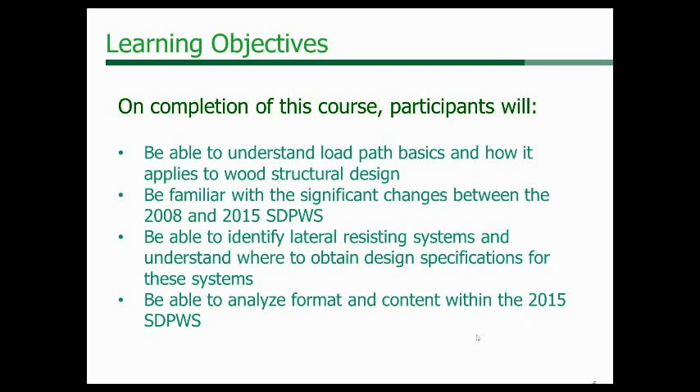Today we're going to talk about being able to understand load path basics and how it applies to wood structural design. We'll also look at the significant changes from the 2008 to the 2015 wind and seismic provisions. And then you'll be able to identify lateral resisting systems and understand how to obtain design specifications. Additionally, you'll be able to apply, understand the content and the overall organization of the wind and seismic provisions.

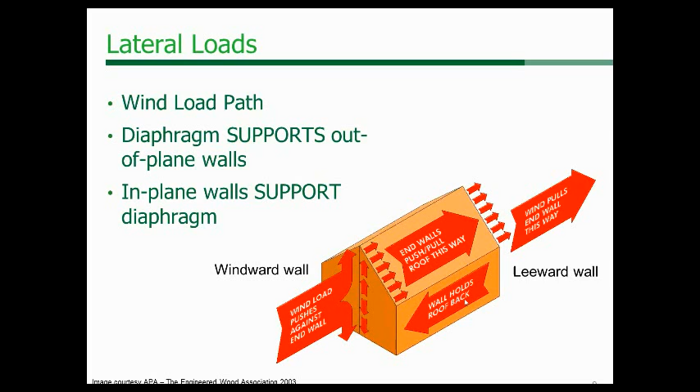And the roof acts like a diaphragm that spans like a big beam to the vertical lateral resisting system, which is typically your shear walls. If we look at a square building, a different illustration, we would see again the wind applying pressure to those studs, and then the diaphragm acts like a deep beam that spans from shear wall to shear wall that resists those loads.

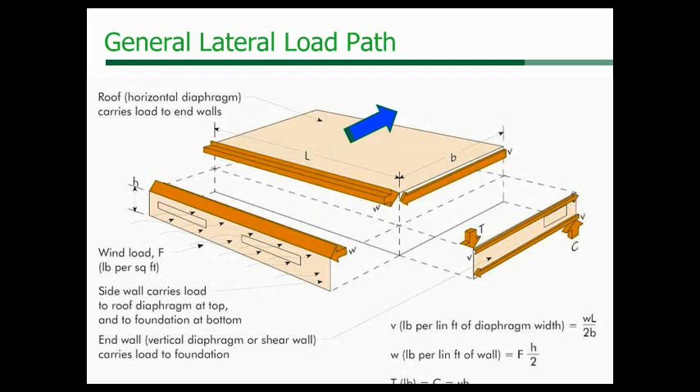Now when we're dealing with seismic loads, it's actually the earth that applies that force to the building, and the building wants to catch up. A lot of that deals with force equals mass times acceleration, the mass of the building that resists that load. We idealize it as if the lateral load is concentrated or applied in the roof diaphragm, and similarly to wind loads, that roof diaphragm acts like a deep beam and transfers the load to the shear walls.

Now if we get a plan view of the diaphragm, we would see that a uniform load on the diaphragm acts like a deep beam. We have the chord forces, compression on the top and tension on the bottom. And then we resist that load. The diaphragm transfers that load to the shear walls, and the reaction goes to the shear walls.

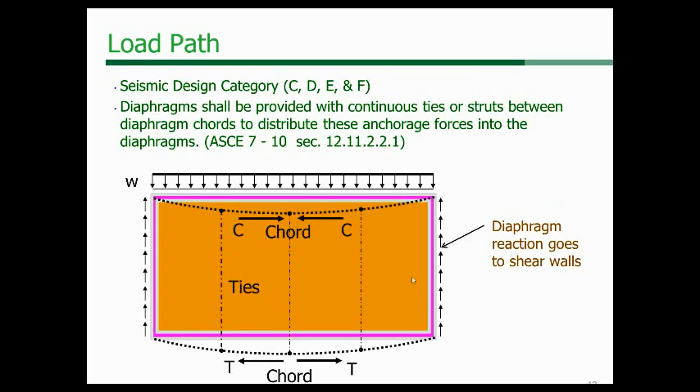And if we're dealing with seismic loads, in seismic design category C through F, we are required to have continuous ties. We'll get more into this when we're talking about diaphragms that resist masonry and concrete heavy wall loads, which is something new to the wind and seismic provisions. But we'll go into this in more depth later in the presentation regarding continuous ties and struts.

The basic structural elements of the building are your diaphragm, which is in the horizontal plane, which has collectors to provide a continuous load path. And then we have shear walls, your vertical lateral resisting systems, and those also have drag struts or collectors to continue the load path to those elements.

If we're looking at diaphragms, we can idealize those diaphragms as flexible or rigid diaphragms. We'll go into that in more depth later in the presentation, because this is one of the areas where we've made some changes to the wind and seismic provisions regarding transferring the horizontal force to the vertical lateral resistance system, and how that looks when dealing with flexible, rigid, or semi-rigid diaphragms.

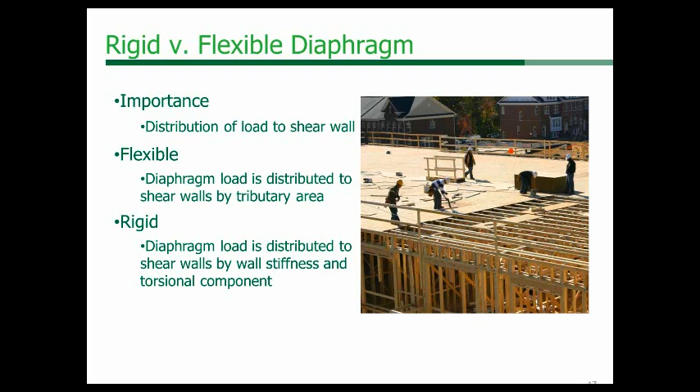We can categorize or idealize the diaphragms as flexible, and flexible diaphragms transfer that horizontal load based on tributary area, whereas a rigid diaphragm transfers the load based on the stiffness of the walls, and there's a torsional component to it as well. Looking at a very simple diaphragm that shows the stiffness of the walls, we have a uniform load on the top, which is a W, and certain stiffnesses of our shear walls. The outer walls have a stiffness of 2 times the interior wall, which is 1K.

If we base the distribution based on a flexible diaphragm, we would see that 25% of the load goes to each outer wall, just based on pure tributary area. So a quarter of the load goes to each outer wall, and half the load goes to the inner wall. Whereas with a rigid diaphragm without a torsional component, we just base it on the stiffness of the shear walls. We would see that 40% of our load goes into each of the outer walls, and 20% into the interior wall, because we have a stiffer wall on the exterior walls. We'll get more into this later when we talk about horizontal distribution, but this gives you an overview of how the loads are transferred between flexible and rigid diaphragms. There's quite a bit of difference in the actual load when you design them the two different ways.

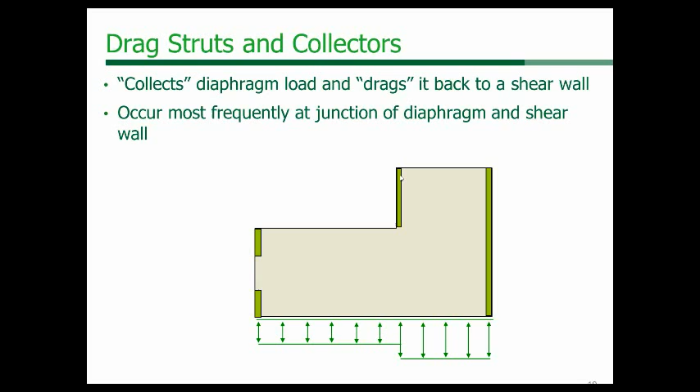As I mentioned previously, we talked about having a continuous load path. We're looking at a typical layout of a load in the north-south direction, up and down the sheet, and the shear walls involved. We have some walls on the left, a middle shear wall, and one on the right. In the east-west direction, we would have a similar layout of shear walls. The key is we want to be able to transfer the load from our diaphragms and make sure that load gets transferred to the shear walls, and that's where we incorporate collector beams that can be in the plane of the floor.

In addition, we'll require some type of drag strut to make sure that the load is transferred within the line of the shear walls to make sure we get distribution to those walls.

If we're looking at a section of a drag strut within the roof diaphragm, we would see a collector beam, making sure that collector beam is nailed off from the diaphragm to the collector beam to transfer that load.

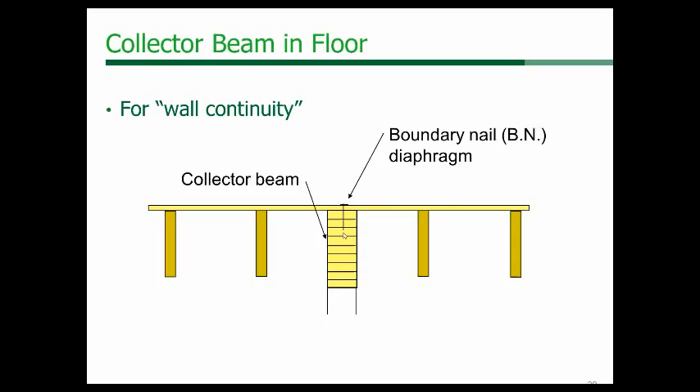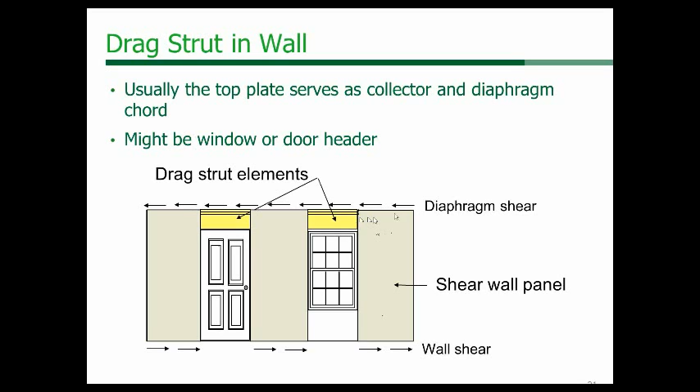Similarly, in the wall plane, if we're treating this as segmented shear walls, looking at the full height shear wall, we would need some type of collector to make sure the load gets transferred to these shear walls. A lot of times it's just the top plates, or we could have the headers acting as a drag to connect it to each other.

Now, going back into basics regarding shear walls, this is just a typical shear wall, a 4x8 shear wall. There are 5 parts of the shear wall. We have the wood framing that makes up the skeleton of the shear wall, and then we have the wood structural panels and the nails.

The wood structural panels and nails provide the stiffness and strength to that shear wall to resist the loads that we want to resist. Then we have the anchor bolts and the plates, the washers or connectors at the bottom of the plate that transfer the load from the top.

We start off with the load at the top of the wall. It gets transferred through the framing and the wood structural panels and nails to the bottom of the wall, which gets transferred to the foundation through those anchor bolts and plates. Then to resist overturning, we have hold downs, because when this load is applied, the load wants to overturn that wall.

There is a difference between the vocabulary of uplift and overturning. I think Buddy will get into this later when he talks about overturning, but for those used to designing in seismic areas, they tend to say there's uplift on the end of the hold down, and there's a different uplift we design for, which is uplift of the building because of the uplift of the roof — we'll look at that later. But the overturning of the shear wall is resisted by the hold down, and I'm sure Buddy will clarify this.

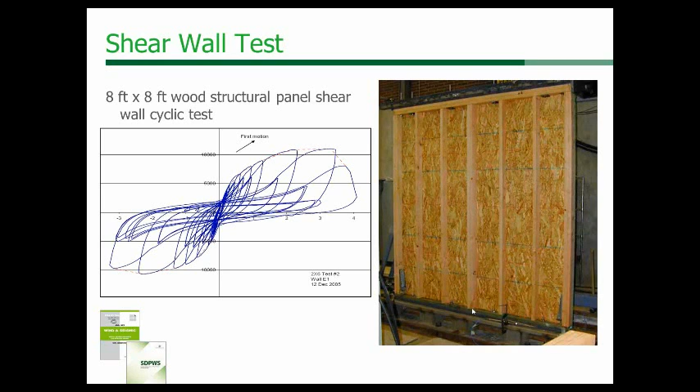Also, the panel joint that you see, these are two 4x8 panels. The panel joint, there were some challenges here with pulling out. I'll show you here. Where previously, if there was heavy nailing and there was only one stud there and a lot of nailing, there can be some issues there. But Buddy will mention this later in the presentation.

Some typical failures shown here: for the picture on the left, we have nail yielding at the adjoining panel edges, and for the picture on the right, we have nail yielding where the head of the nail is pulled through the panel, and also nailing on the left where it's pulled away from the framing. But the mode of these failures is the nail yielding, which is what we want. We want a ductile failure, not a brittle failure.

Buddy will mention this when it gets into the detailing requirements. A little bit of background: in the wind and seismic provisions, there are 3 types of shear walls that are covered.

We have the individual full height segment walls, which is what has been used throughout many years of designing shear walls, where we're dealing with a hold down. Here on this end, we have a shear wall here where there's a hold down here and here. And then there's a shear wall here with a hold down here and here.

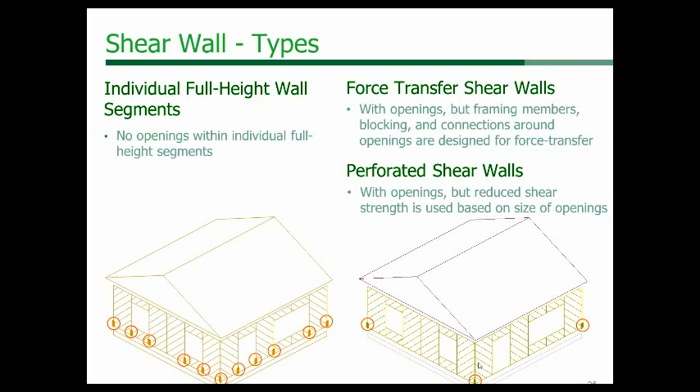Now, how is this adopted in the code? In the 2012 IBC, which many of you may be on, the 2008 is the reference document for the wind and seismic provisions in the 2012. It's not until we get to the 2015 IBC that it adopts the 2015 wind and seismic provisions. That's how it's adopted. And all previous, I believe even 2006 and 2009, adopted the 2008 also as a reference document.

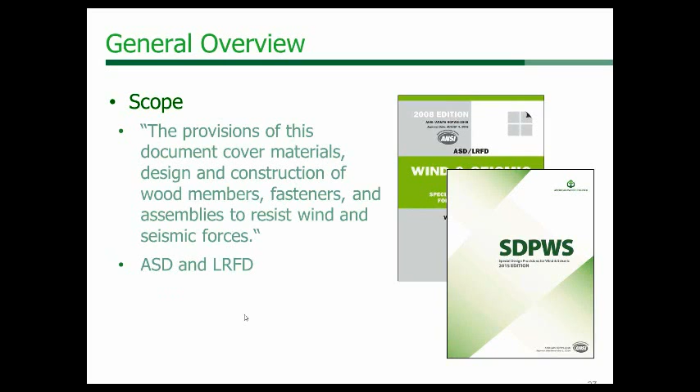Now, what does the wind and seismic provisions cover? The provisions cover the materials, design, and construction of wood members, fasteners, and assemblies to resist wind and seismic loads. It includes both a dual format, ASD and LRFD, and we'll point these out throughout the presentation on the differences.

The first chapter is very basic. It's our design flow chart, and the philosophy of how this is created is that you assume a trial design, you decide what method you want to use, ASD versus LRFD, and you go down the path, hopefully your capacity is greater than your demand. If it's not, you do a reiterative process and try a new design.

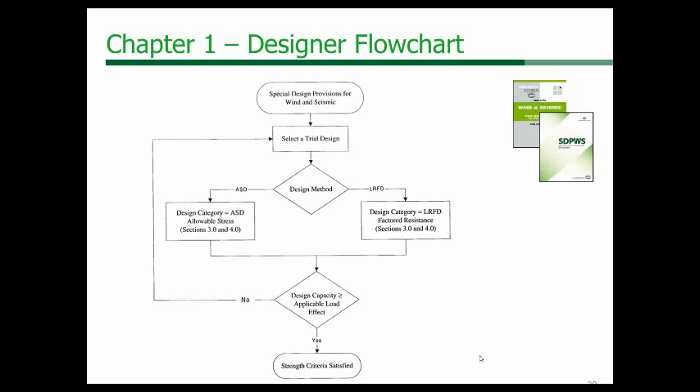General requirements is in Chapter 2, and this is where we get into our terminology, our notations, the abbreviations that are used throughout the wind and seismic provisions.

One section new to the 2015 wind and seismic provisions is section 2.1.3, and it has to do with sizes. It's to incorporate the language that we use nominal panel thicknesses when providing these provisions, as it relates to performance category nomenclature of PS1 and PS2. We all know panels are manufactured very dry, and when they get to the job site they tend to acclimate, and the thickness changes with the environment in service use. This section provides clarifying language that what is assumed is that we are using nominal panel thicknesses in the design provisions.

Also new to Chapter 2 are definitions. If some of you are familiar with the 2008 wind and seismic provisions, you know we had a section for open front diaphragms and cantilevered diaphragms. They were actually 2 separate sections.

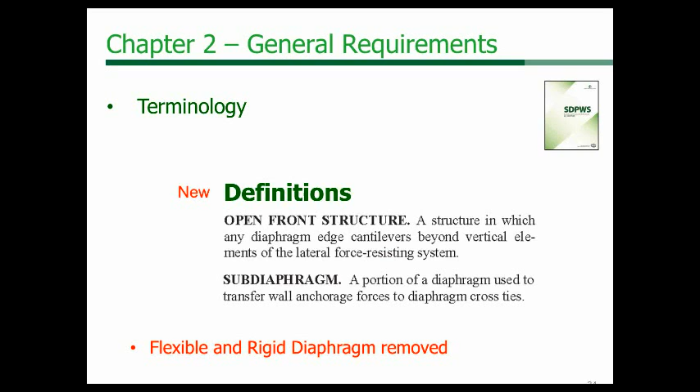Additionally, we've added a definition for subdiaphragms: a portion of the diaphragm used to transfer wall anchorage forces to diaphragm cross ties. This was incorporated because we have a new section covering subdiaphragms related to anchoring of heavy walls, such as concrete and masonry walls, into the diaphragm. We'll go into that in more detail later in the presentation.

We've also removed the definitions for flexible and rigid diaphragm, to avoid conflicts with the definitions in ASCE 7-10, and also because you don't really have a flexible or rigid diaphragm -- you can idealize it. That's the language we'll use throughout the wind and seismic provisions, and we'll show you how you can idealize it as a flexible or rigid diaphragm later in the presentation.

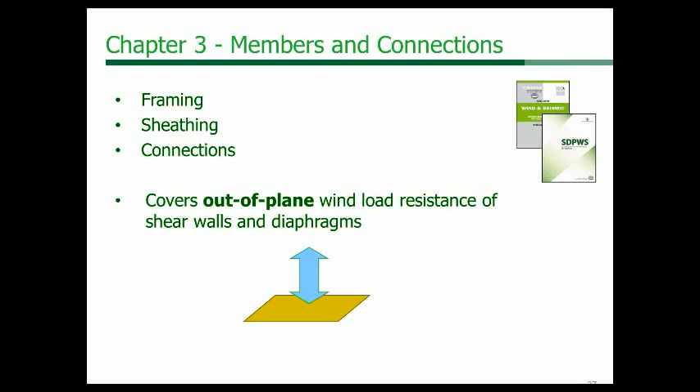Now we're getting into Chapter 3, which is members and connections. This deals with your framing, your sheathing, and your connections, as well as those members resisting out-of-plane loads, your diaphragms or the sheathing for the walls. This is a section you would go to for out-of-plane and individual framing and connections.

One change for the wind and seismic provisions has to do with the repetitive member factor for wall studs when designing wall studs for out-of-plane loads. If wind is being applied to that framing system, it needs to resist flexure and out of plane, or resist a load out of plane.

This repetitive member factor accounts for a composite action that occurs because we have a wall stud that's nailed off to the wood structural panel, and there's also an assumption that it's connected to the gypsum on the other side—those assumptions are spelled out in this section. There's a composite action because all those members act as a system together.

What's new to this section is that you can apply this not only to strength, your flexure resistance, but also to stiffness when checking deflection of that wall stud. If you have a brittle finish and need to check stiffness, this repetitive member factor can be applied—so now it covers both strength and stiffness, your EI.

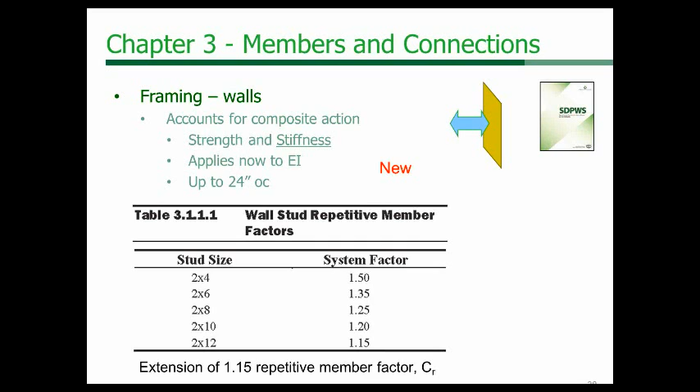In addition, what's new is we've increased the spacing of the studs from 16 to 24 inches, so this can be applied to 24 inches on center as well.

A revision has also occurred to the out-of-plane table, which covers nominal uniform capacities for wall sheathing resisting out-of-plane wind loads. Previous to 2015, in the 2008 edition, the sheathing capacities were based on a 3-ply product, but it was found impractical to manufacture 3-ply, and those panels are no longer commercially available. So now, for the 4824, the values are based on a 4-ply panel, which has more stiffness and more capacity, so you'll see an increase in the values.

Similarly, for out-of-plane wind loads on roof systems, we've had an increase in capacities because now it's based on a 4-ply or 5-ply panel, depending on span rating, instead of 3-ply. So that's new to the system.

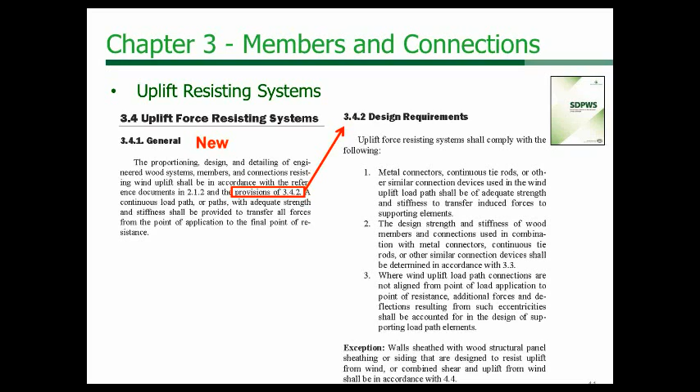But for areas with that net effect, the load has to be transferred all the way to the foundation. What's new is section 3.4, which covers the continuous load path of that load down to the foundation, and provides charging language that you need to provide a continuous load path adequate in both strength and stiffness to resist the uplift load. It also addresses eccentricities in the system that need to be accounted for in design.

I'll get more into that in this slide. So we have uplift of the rafters, and that uplift needs to be resisted. We need to provide a continuous load path all the way down to the foundation, whatever system you provide. In this illustration, we have straps connecting the studs continuously, plus additional straps where there's a discontinuity in the framing system.

When I mention eccentricity, sometimes—and this may happen a lot—you may have an eccentricity in your load path because the studs don't all line up, or your rafters don't line up all the way down. If there are eccentricities in that load path, that needs to be taken into account in the design. You could specify that they all align, but you may run into issues.

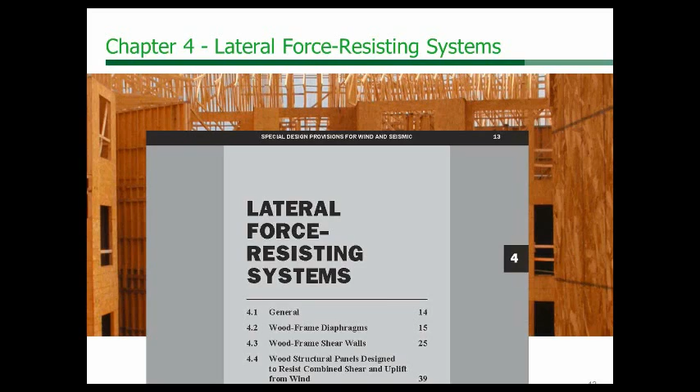Now on to the bulk of what we want to talk about: our lateral resisting system, which resists loads in plane. This is where we talk about diaphragms and shear walls. When I'm through with diaphragms, Buddy will take it from there on shear walls. This section covers wood diaphragms and wood shear walls that resist in-plane loads—diaphragms is what we'll get into now.

Hopefully all of you are still with me. Now, let's talk about the introduction of the definition of sub-diaphragms, which I mentioned earlier.

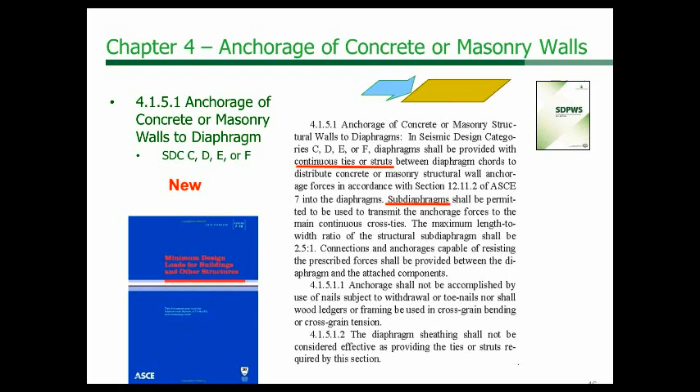When we're dealing with seismic loads, if we have diaphragms spanning from shear wall to shear wall, these concrete walls will tend to want to pull away from the diaphragm when an earthquake occurs. It's very important that the wall is anchored into the diaphragm enough so it can resist the loads in the diaphragm and then transfer that load to our shear wall. That occurs in the opposite direction as well.

This is very evident in past earthquakes where there have been failures on buildings where they weren't adequately anchored into the diaphragm, and the wall pulled away from the diaphragm, causing a collapse of the roof.

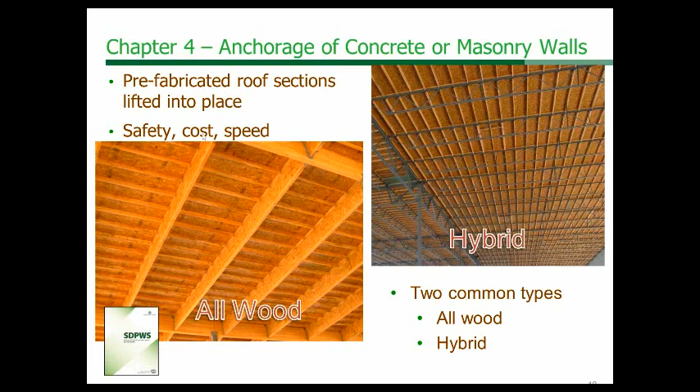There are two basic types of diaphragm: an all-wood diaphragm, or a hybrid diaphragm that uses steel bar joists. The whole philosophy is that if you have a wall, we want to anchor it through these subpurlins into the diaphragm to develop the load enough so it can transfer to a larger diaphragm, which then transfers through to the shear walls and also ties across to the other side of the building. We would anchor perhaps every other subpurlin, continue the tie, and develop your diaphragm loads so it transfers from this sub-diaphragm to a larger diaphragm that has a tie across the building.

Here's a detail showing that. Now, the one thing I want to point out is that for diaphragm loads, when we anchor this wall into this purlin, we want an anchor on each side of the purlin to prevent eccentricities that can occur if it's only loaded on one side. Additionally, we want to nail off this diaphragm to the purlin to make sure you're developing that load into the diaphragm, and then provide continuous ties across.

Especially in seismic design category, I think I mentioned C through F, or maybe it was B through F earlier in the presentation. Here's another example of a tie that's anchoring this either masonry, CMU, or concrete wall into the diaphragm.

What we don't want is this, which has occurred in previous detailing. Since they're not tying this into the diaphragm, this can cause cross-grain bending in the ledger, which has caused some failures in the past. So we don't want this type of system.

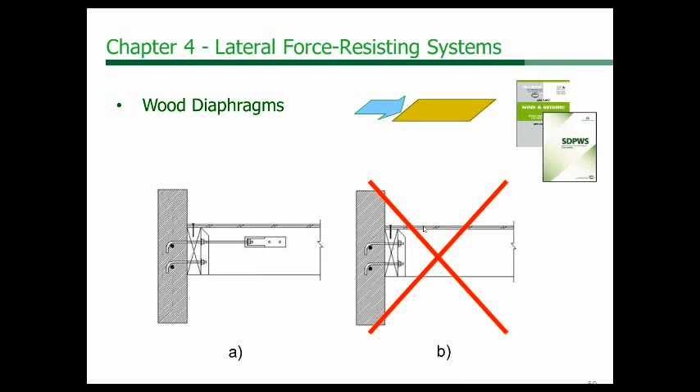What we want is to have it tied into the purlins or sub-purlins to drag that load into the diaphragm and develop it into the diaphragm. So this is a new section, charging language that covers this type of design.

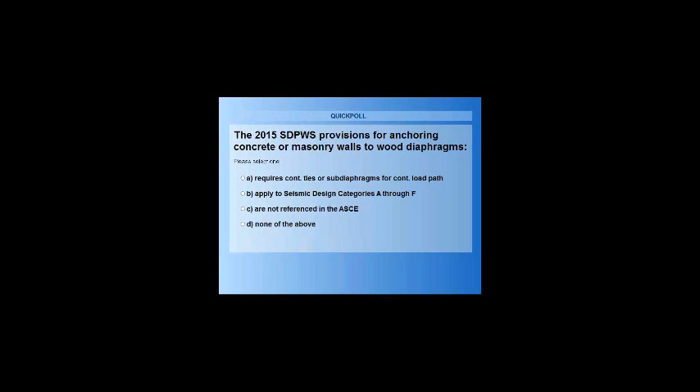Sharing results: 93% say it requires continuous ties or sub-diaphragms for continuous load path. 3% say it applies to seismic design categories A through F. 1% say not referenced, and 3% say none of the above.

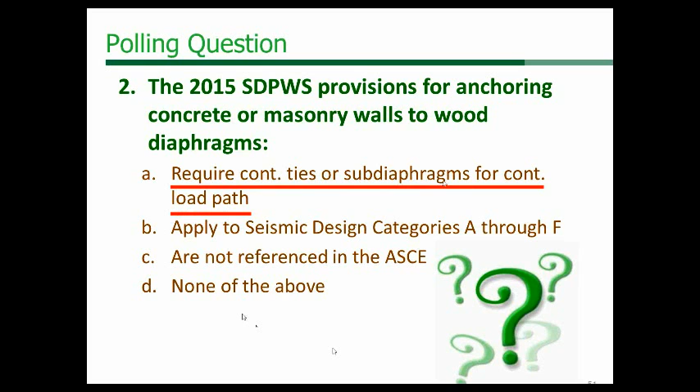The real answer is that it requires continuous ties and sub-diaphragms for continuous load path, and it does not apply to category A through... I believe it's C through F, or D through F. It is referenced in ASCE 7, so the correct answer is some of the above, answer A. Most of you got that right, so that's great, we're communicating clearly hopefully.

Now, wood diaphragms. In section 4.2.2 we have the deflection equation, which is now a three-part equation - it was actually a four-part equation in the 2008 Wind and Seismic provisions. The first part deals with bending, chord deformation excluding slip. The middle term includes shear, which is panel shear and nail slip, combining the two inner terms of the original four-part equation. The last term covers bending, which includes chord slip.

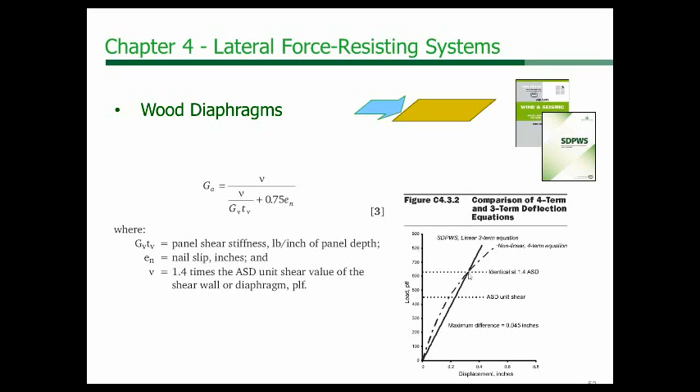That's the great news about going from a four-term to a three-term equation. For die-hard four-term equation fans, it's still in the commentary of the Wind and Seismic provisions, but again that's only for blocked diaphragms. When we transitioned from a four-term to a three-term equation, you can see on this chart that the three-term equation is linear, straightening it out, whereas the four-term was non-linear. But at strength level forces, 1.4 ASD, the two equations are identical, and between 0 and strength level forces there's a difference of only about 0.045 inches - very little difference between the two equations.

If you're interested in the 2008 commentary - Buddy, you can fill me in later - there's an actual design example of mid-span diaphragm deflection. I believe it's going to be in the 2015 edition as well, and Buddy can confirm that later; the commentary is being developed right now.

Now we're looking at capacities. We have a demand on the diaphragm, so we go to table 4.2 to get our nominal unit shear capacity wood diaphragm values. I mention nominal because this table is to be utilized for both ASD and LRFD. There are also two sections: section A for seismic and section B for wind. The seismic section includes the apparent shear stiffness values as well for both OSB and plywood.

These tables were developed based on applying a 2.8 factor to those values that were in the legacy IBC, which has to do with the PS2 and PS1 performance standards used for manufacturing the panels. A safety factor of 2.8 is incorporated into those performance standards and applied to the IBC legacy values, so you multiply to get a wind nominal unit shear value. Then the straight ratio from wind to seismic design is 1.4, which is a typical value.

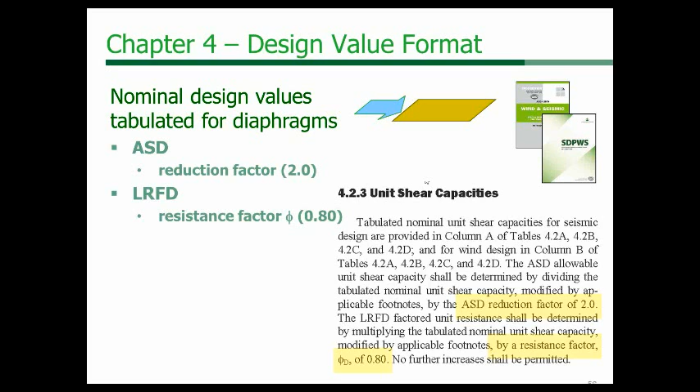You divide by 2 to get it into an ASD value, and you multiply times 0.8, the resistance factor, to get it into an LRFD value. And that was true, no changes to those tables from 2008 to the 2012 or 2015 editions.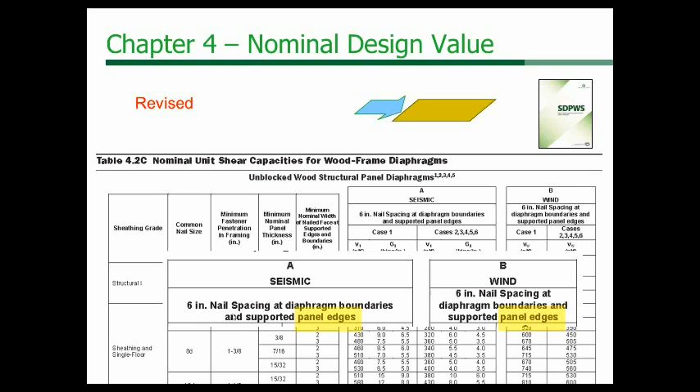There's been a slight revision, or clarification, for the unblocked diaphragm notes - if you see the highlighted note that says 'panel edges.' Before, it used to say 'members,' and there was some confusion that the nailing of the members to the framing, and even field nailing, needed to be decreased from 12 inches, or whatever it is, to 6 inches on center. This is just a clarification that we're talking about the panel edges, not the field nailing. So it's a slight change, a slight clarification.

You'll also note that the illustrations for the diaphragm configurations have changed, just to make things more clear. We've grouped case 1 and 3, case 2 and 4, and case 5 and 6 together, to illustrate that the capacity of the diaphragm depends on the direction of load relative to the continuous panel joints and the framing members - it's independent of the panel orientation. I'll give you an example.

For example, here where we have case 1 and 3, we have a load in the east-west direction. The continuous panel edges on load case 1 and 3 are all in the same direction, as you can see in the illustration. Right below it, the panels are oriented 90 degrees, but the continuous panel edges are still in the same direction, and the framing is in the same direction. So this clarifies it a little more clearly.

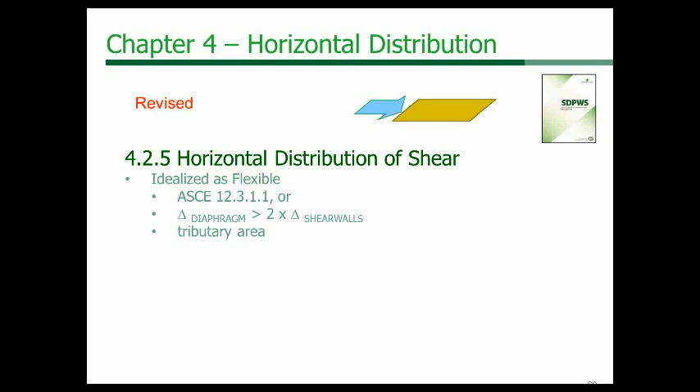ASCE has some prescriptive provisions - meaning it's a recipe - where if you meet them, you can categorize it right off the bat as a flexible diaphragm. For example, if you're a 1 or 2 family dwelling, or have less than or equal to a 1.5 inch concrete topping with certain light frame construction, you can categorize it as flexible. You can also calculate the deflection of your diaphragm and shear walls - if your diaphragm deflection is greater than 2 times your average shear wall deflection, you can idealize your diaphragm as flexible. That tells you that you meet one of these criteria, and you can transfer the load to the shear walls based on tributary area.

The other method is idealizing it as rigid. Similarly, ASCE 7 has a prescriptive method that states if you meet this criteria, you can idealize it as rigid. However, in ASCE 7, prescriptively, there's no way for a wood diaphragm to meet that criteria as rigid, because it requires it to be concrete or concrete over metal deck. There's no provision for a wood diaphragm to prescriptively meet the rigid criteria.

You also have a calculated method of determining if you are rigid - that is, your diaphragm deflection is less than or equal to 2 times your average shear wall drift. Then you can transfer the loads based on the lateral stiffness of your vertical lateral resisting system. Now beyond that, let me go here.

What is new to the wind and seismic provision is the envelope. If you can't idealize a diaphragm as flexible and you can't idealize it as rigid, you're semi-rigid, and analyzing something as a semi-rigid diaphragm is a complex analysis. I'm not sure many engineers actually go through these difficult calculations to determine a semi-rigid analysis. What we've introduced in the wind and seismic provision is the envelope solution: you analyze it as flexible, you analyze it as rigid, and you take the governing load to those shear walls. You're over-designing it by a little bit, but you're taking that envelope solution to analyze that structure.

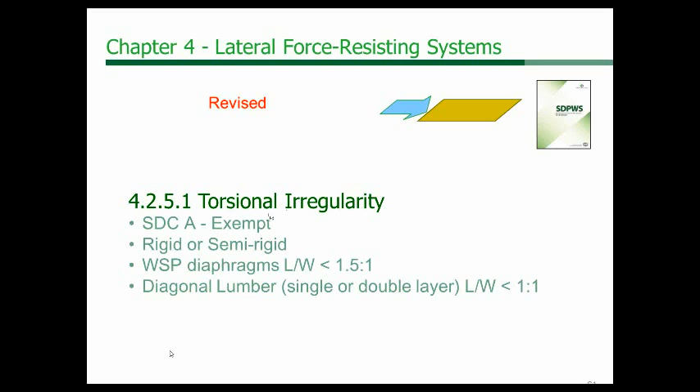For torsional irregularity, Seismic Design Category A is exempt from considering these torsional irregularity parameters. If you're transferring loads in a torsionally irregular system, the diaphragm needs to be analyzed as either rigid or semi-rigid. It makes sense — how is it going to transfer the loads to those vertical lateral resisting systems without having some stiffness to that diaphragm to transfer the load?

Now, for diaphragms that are torsionally irregular, the wood structural panel diaphragm aspect ratios are reduced, so L over W needs to be less than 1.5 to 1. For diagonal lumber diaphragms, either single or double layer, that aspect ratio is 1 to 1.

For those that are torsionally irregular, there's a check that needs to be performed: the maximum story drift at A needs to be greater than 1.2 times the average of A and B. That's your check for determining if you're torsionally irregular. The one thing that the language in the wind and seismic provision has clarified is this specific check — it now states that you need to check the story drift per this equation.

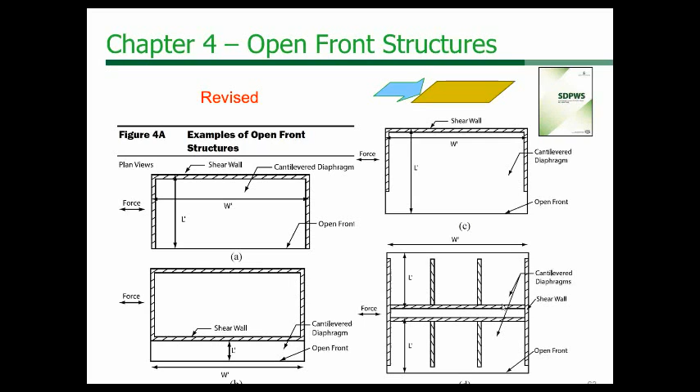What's new, to reflect what's really going on in the industry and how buildings are being built, are illustrations C and D, especially D, which reflects many mid-rise structures that have a long corridor through the center of the building, with an open front diaphragm. So we'll go into more detail on open front diaphragms and the related criteria. For open front diaphragms with no torsional irregularity in the building, it's similar to a torsionally irregular building — the aspect ratio for wood structural panels is L over W of 1.5 to 1.

And then similarly, diagonal lumber, single or double layer, is 1 to 1. Has to be less than 1 to 1. Now, if you're open front diaphragm and also torsional irregular, then the aspect ratio is even more strict. For those buildings over 1 story, it needs to be less than 0.67 to 1, and for 1 story, you get a little break of 1 to 1.

In addition to the criteria I mentioned previously, you also need to check to make sure you meet the allowable story drift, ASD story drift, which means that drift needs to be less than the allowable story drift at the outer edge of the building. So this provides you with a specific criteria that needs to be met on the drift at the edge of the building, or the outer edges of the building. And it needs to be modeled as semi-rigid or rigid.

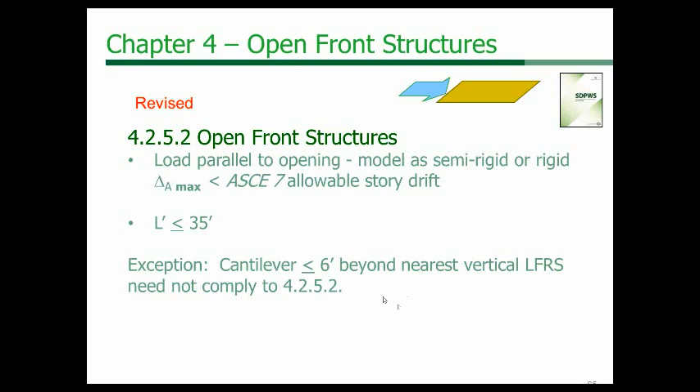And there's an exception to the rule. You can have a cantilever for those that have a 6-foot cantilever beyond the lateral resisting system. The vertical lateral resisting system doesn't have to comply with the 4.2.5.2 provisions. So you get a break for just a 6-foot cantilever.

Also, if you're dealing with, for example, a garage that's only 1 story, it's not going to have as much of a challenge resisting the load since it's 1 story. As long as you don't have to meet the provisions of 4.2.5.2, and you're only 1 story, your diaphragm depth is less than 25, and your aspect ratio is 1 to 1, you can idealize it as rigid without going through all the other criteria, and distribute the load to the shear walls through the torsional method.

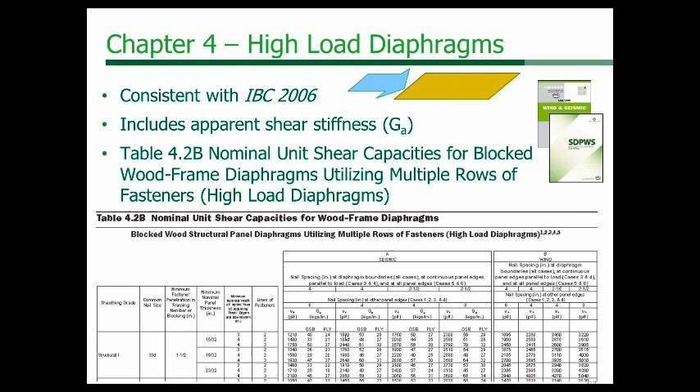Now, on to high-load diaphragms, and we're almost coming up to the end of this section. High-load diaphragms were in the 2006 IBC, and introduced into the 2008 Wind and Seismic provisions. High-load diaphragms provide you with almost double the capacity of what you'd see for regular diaphragms. It looks similar to the typical diaphragm table, with nominal unit shear capacities, a wind section and a seismic section, but it also requires multiple nominal thicknesses, requirements of your framing members and depths, and 2 or 3 lines of fasteners instead of just one, plus special inspection of the diaphragm to utilize this method.

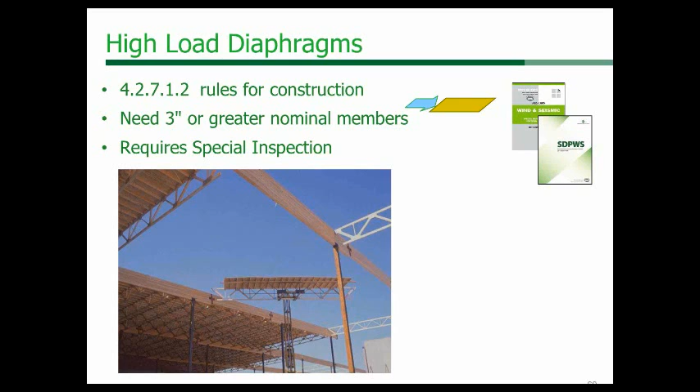Similarly to the previous load capacity diaphragm tables, we have a revised configuration of the figure showing the different load cases. As I mentioned, it requires special inspection and a 3x minimum framing member to nail to, or 2 2x—Buddy will get into that later. There's also a clarification in the 2015 that a minimum depth of the framing member is required, which is 3x minimum. This also came from the IBC into the 2015 Wind and Seismic provisions.

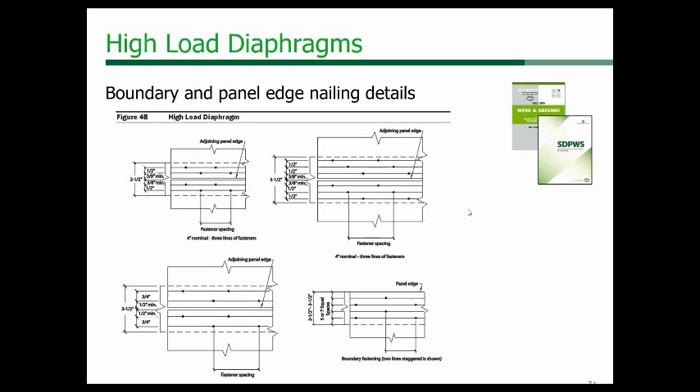Here's an illustration in the Wind and Seismic provisions showing multiple rows of nails. You can see a framing member that needs to be 4x minimum because of 3 rows of nails, with the panel joint here and 3 rows of staggered nails on each side of that joint. This shows one of the reasons why we require a 3x minimum as opposed to a 2x minimum—when you get closely spaced nails, it can cause splitting.

So we have our last poll, I believe, for my section. That is true. Sorry, I had trouble finding my little button.

Open front structures are limited to a maximum diaphragm length of blank in the 2015 Wind and Seismic: 25 feet, 35 feet, 50 feet, or open front structures are not allowed in the Wind and Seismic. Several of you are already voting—that's great. Majority of you are already voting on one answer. I'm not going to give it away.

All right, about 10% more I'm going to let vote. Hurry, hurry before I close. That may have should have said maybe over 1 story, but I think the audience will get this answer. You said it correctly because you read the slide, it should have been stated probably different.

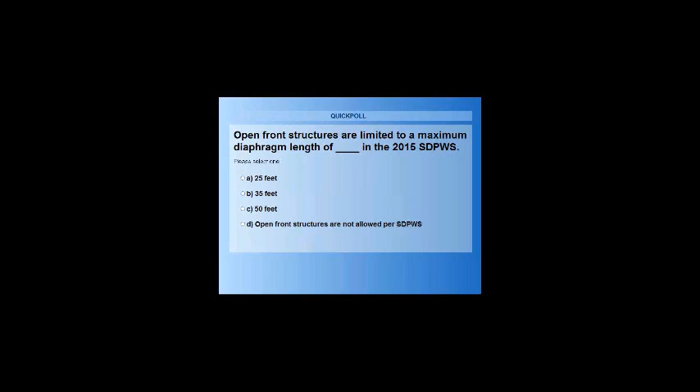Okay, all right, well I'm going to go ahead and close now and then share the answers. All right, 68% of you said 35 feet, 21% said 25 feet, and 9% said 50 feet, and none of you believed that they are not allowed. So, all right, Michelle, I'm going to go ahead and let you share the real answer.

Okay, and the real answer is, drum roll please, 35 feet. And this applies to those that don't meet the requirements of the 1 story, but for those, 35 feet is the maximum length, the depth of the diaphragm. So thank you very much.

We'll transfer over to Buddy. All righty, here we go. All right, there you go. Okay, thank you, Michelle and Marcy.

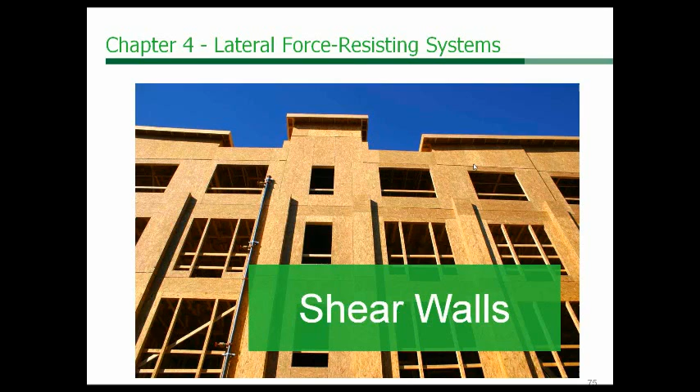We'll transition now into shear walls and then leave some time at the end for some Q&A. As we begin the discussion of shear walls, some of this will be very similar to what Michelle shared earlier.

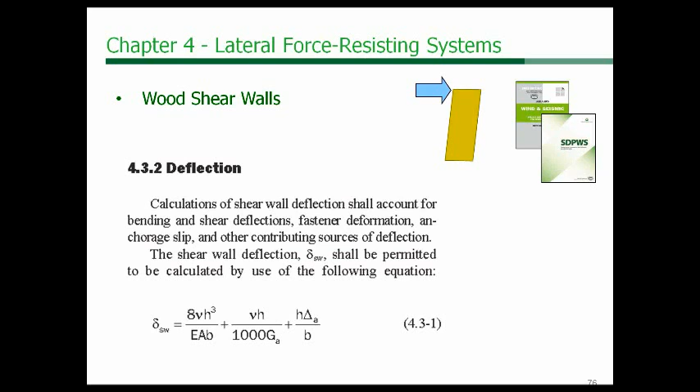The deflection equations used for shear walls are comparable. The three-term equations are what are shown in the body of the document, and the four-term equations are also included in the commentary.

One relatively new provision for structural fiberboard shear walls is an additional reduction that was incorporated because of some additional review of testing, which revealed that we needed to be a little bit more conservative with the structural fiberboard shear walls. So make note of that new reduction there, H over B to the 1/2.

Again, similar to what Michelle discussed earlier with the diaphragm capacities, shear wall capacities are developed in a similar fashion, and so the result is similar capacities to what were shown in the legacy IBC tables that contain those values.

We've had several questions from folks about the fact that the nail shear wall and diaphragm tables have been moved from the IBC into the special design provisions for wind and seismic. That was done intentionally a couple of code cycles ago. The thought was that the ANSI consensus process and the standards development committee, the Wood Design Standards Committee that develops this standard, is a more rigorous process than the code development process.

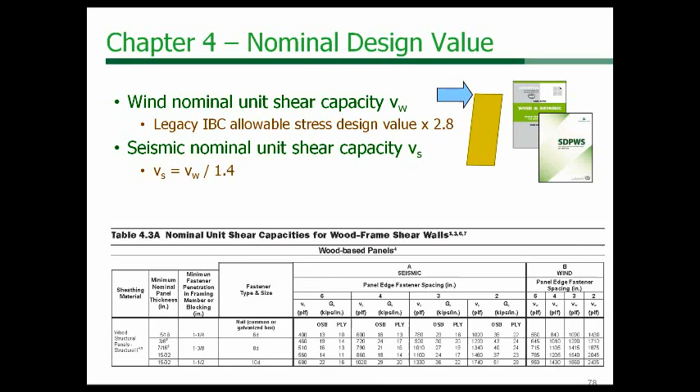But again, similar to what Michelle mentioned for diaphragms, there's an ASD reduction factor of 2 and an LRFD resistance factor of 0.8. We can't stress enough that the design values shown in the wind seismic standard are nominal values. They are neither ASD values nor LRFD values, so you do have to take an additional adjustment factor to those values prior to the design process.

This slide just gives an indication of how that works. We also had some questions along the way about the load factors and how that impacts the design.

Based on these ASD and LRFD reductions in the load factors that are used for LRFD versus ASD, you do see a benefit, a strength benefit for LRFD of about 12% based on the load combinations shown here.

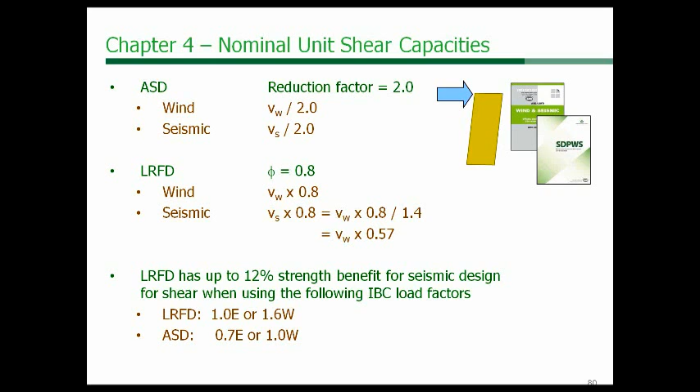We've done our best over the years to calibrate the LRFD approach to historical ASD design provisions, but as the load standards and load factors are changing and research is going into that area, the LRFD load combinations, you will see cases like this where you do see some benefit to LRFD versus ASD.

Note also that for shear walls sheathed on two sides - this is not a change since both the 2008 and 2015 wind and seismic standards show this. This deals with two-sided shear walls and nailing to opposite sides of the shear wall. Footnote 6 states what needs to be done, but it's easier to see with a picture.

Where you have adjoining panel edges and the panels are staggered on opposite sides - so here's a panel joint with nailing, but the other panel joint on the other side is elsewhere - then 2x framing is acceptable. The problem is if you've got adjoining panel edges on opposite sides on the same framing member. Test results show this creates potential for splitting because you've got so many nails into that framing member. So when they're not staggered, you're going to have to go to 3x framing. That's the illustrated version of footnote 6.

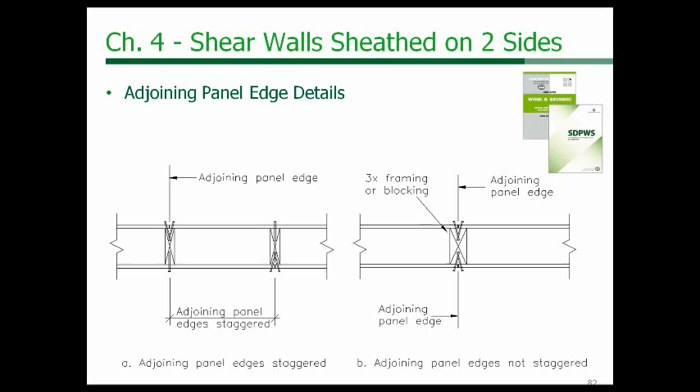Unblocked shear walls are also possible - again not a change, but we want to point it out. Another question that came in while Michelle was teaching had to do with laying up panels horizontally versus vertically, which is a regional preference. I've heard that in North Carolina, for example, they like to lay panels up horizontally on shear walls, and unless you block the edges of those horizontal panels, you'd have to use this unblocked shear wall adjustment factor. You can get as much as a 60% reduction in capacity at 24 inches on center.

The normal 16-inch on center has a reduction of about 40% for 6 and 12 nail spacing. But it is possible to use unblocked shear walls. There is a 16-foot height limit and a 2-to-1 aspect ratio, but it has been tested and shown to work, and that applies not only to the strength of the panels and the layup, but also to the stiffness. So you'd have to account for that reduction in your stiffness calculations as well.

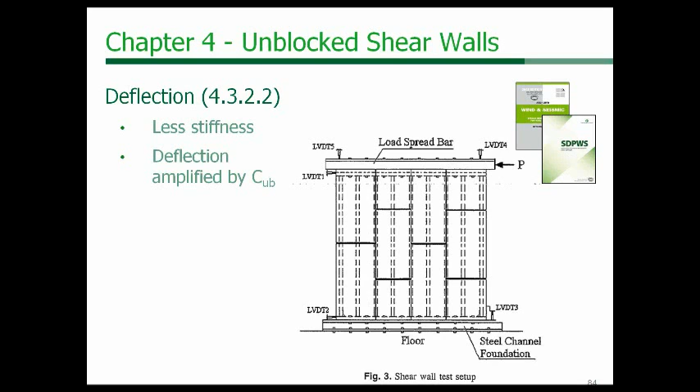Again, not a change, but something we like to talk about to make sure everyone understands: if you are summing shear capacities and there are dissimilar materials on opposite sides of the shear wall, you're either going to take 2 times the smaller nominal unit shear capacity or the larger nominal unit shear capacity on one side, whichever is greater. But there is an exception for wind design - the wood structural panels and gypsum on the opposite side are additive in that case. That gives you an additional benefit in high wind zones where you're able to account for the gypsum on the opposite side of the shear wall.

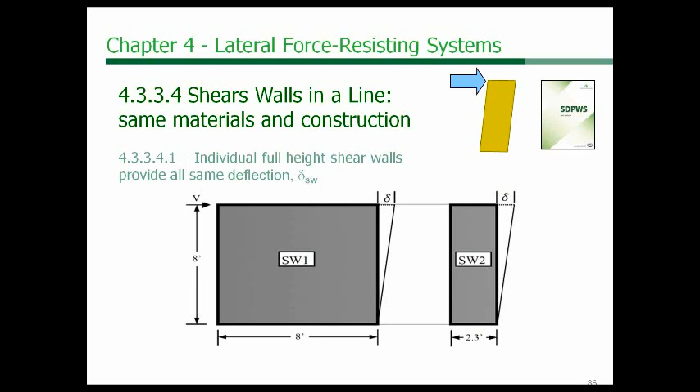Now, something new for the 2015 version of the Wind and Seismic provisions has to do with shear walls in a line. In section 4.3.3.4.1, the default provision is this distribution based on relative stiffness, or equal deflection approach, as it's sometimes referred to. While this concept is not new, there is a new exception to this provision that should be helpful - it's a simplified approach.

The exception in the 2015 standard allows this simplified approach, which permits a distribution of shear in proportion to the nominal shear capacity of the individual full height segments, provided certain requirements are met. For wood structural panel shear walls, this distribution of shear is permitted provided that the nominal shear capacity is adjusted by the factor 2b sub s over h for wall segments with aspect ratios greater than 2 to 1. This factor is based on reduced stiffness observed from testing, and provides roughly similar results to the equal deflection calculation method for a reference wall line configuration comprised of a 1-to-1 aspect ratio and a 3.5-to-1 aspect ratio.

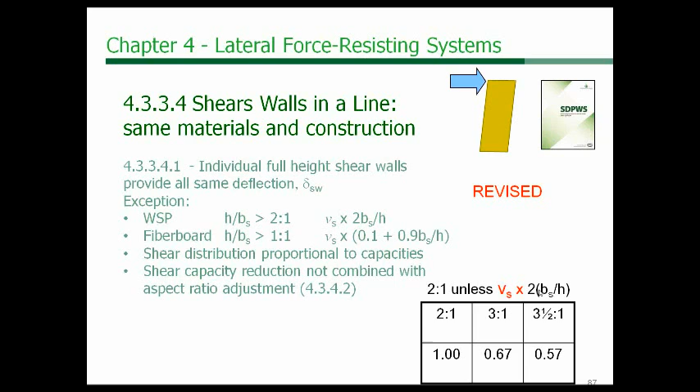What I want to show you in this table is that the reduction for a 3.5 to 1 aspect ratio is about 0.57. I also want you to note there was a typo on page 87. That should be V sub S times this reduction, shown in red there.

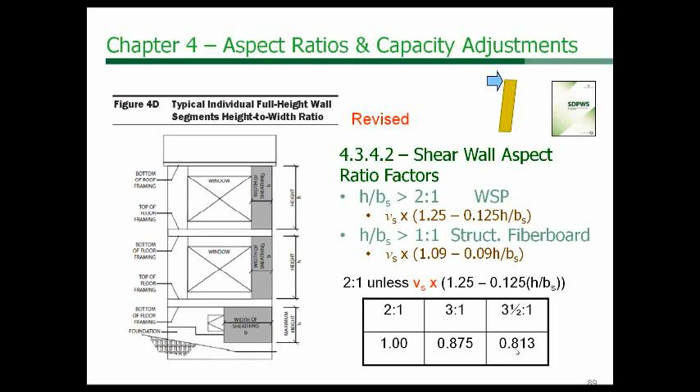And so you see here in this table that the reduction factor, not quite as significant as the one we saw earlier for strength, but I mean for stiffness, but it is for 3.5 to 1 aspect ratio in the range of 0.813.

Then we'll move into the perforated shear wall method. The last slide we were talking about dealt with the segmented, the traditional shear wall method. For perforated shear walls, there is a similar approach, but these have also been revised in the 2015 Wind and Seismic standard.

So in previous editions, where this high aspect ratio adjustment was considered, it was applied to the overall perforated shear wall capacity. But the revision to the 2015 allows that adjustment to apply only to the high aspect ratio perforated shear wall segments based on the stiffness compatibility considerations, as opposed to the overall shear wall.

This will generally permit an increase in the design strength of your perforated shear walls where you're incorporating these high aspect ratio segments. For example, if you have a wall with a couple of windows near the ends of the shear wall and a much longer full height segment between those windows, you're going to see an increase as opposed to the previous editions that penalized the entire wall.

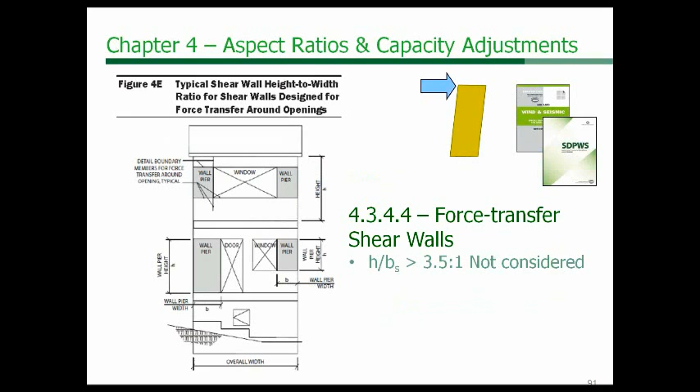When we talk about perforated shear walls, again, we want to make sure that everyone understands there is the tabulated approach where these values are shown and are used to adjust the shear capacity for the shear walls.

Near the beginning of the presentation, Michelle showed a couple of examples. The benefit of this perforated shear wall approach is that it allows you to move or remove your hold downs from those interior openings. So if you have windows and doors in the interior of your wall, you wouldn't need hold downs around each one of those openings. You could put your hold downs at the corners, use this adjustment factor, and that basically bumps up the strength and stiffness of your wall.

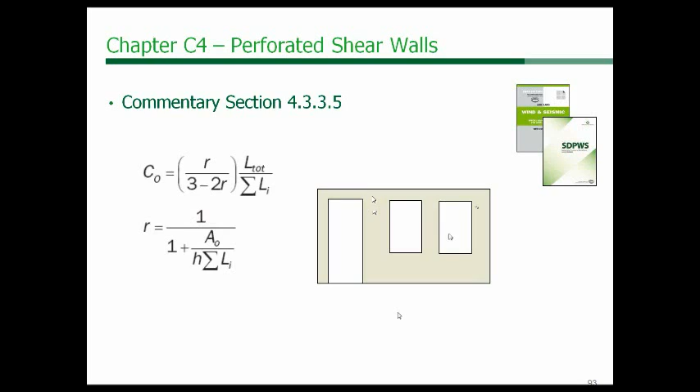There is, however, an equation that can be used instead of the tabulated values that gives you a bit of an advantage. If you want to program that equation, the advantage is that it doesn't penalize you for that full-size opening. In the table shown earlier, it assumes the maximum opening. So this door, for example, would be the maximum opening in your perforated shear wall. It doesn't give you any benefit for the sheathed areas below the windows. But the equation allows you to calculate the percentage of openings in the wall as a function of the entire wall area, giving you an additional advantage if you're not intimidated by it.

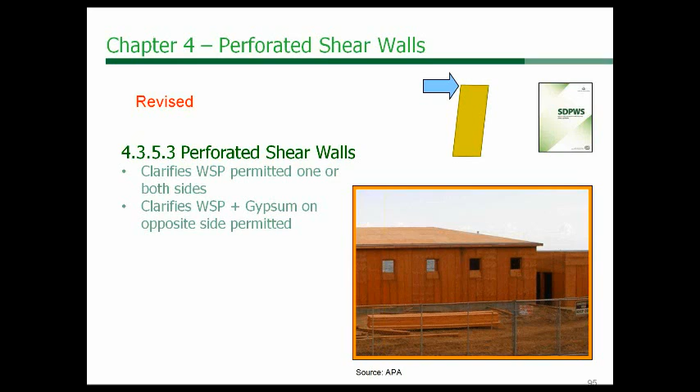A slight modification or clarification in section 4.3.5.3 clarifies which materials can be used with the perforated shear wall design methodology. It clarifies that wood structural panels on one or both sides are permitted, as well as gypsum wallboard on the opposite side of wood structural panels. Just a clarification for that particular provision.

So I'll ask Marcy if she will come back and lead us through our next poll question.

Maximum allowable shear wall aspect ratios in the 2015 Wind and Seismic: are they not included, do they vary depending on the wall sheathing material, are they independent of wall sheathing material, or do they vary depending upon the shear wall anchorage? I see most of you are already voting.

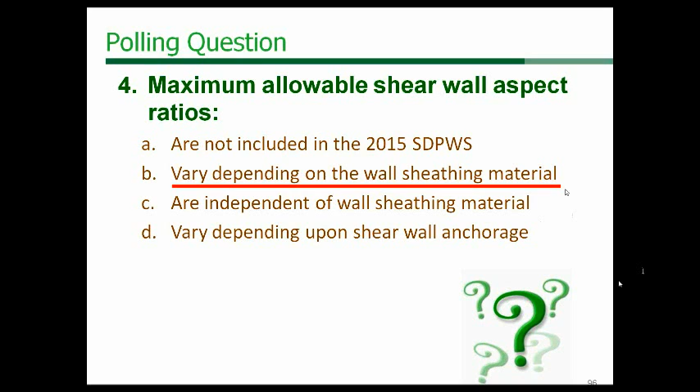So let's move along into some of the construction requirements in section 4.3.6. This is a slight modification or clarification to let folks know that if you want to substitute two 2x members to replace a 3x framing member, in the 2008 edition that was buried pretty specifically in the wood structural panel shear wall section. We've moved that out ahead of that section so it's clear it applies not only to wood structural panels but structural fiberboard as well. Also clarified that two 2xs can be substituted for a single 2x, and while that wasn't necessarily prohibited before, it's now just clarified. Where that might come in handy is in a panelized wall system.

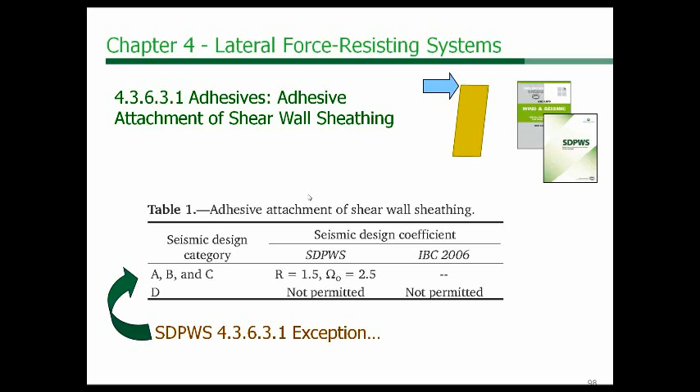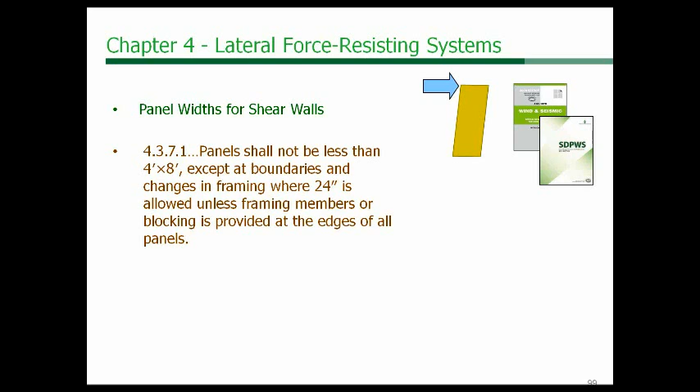Again, not new to the 2015 code, but making sure you know that if you're used to the IBC and wondering where those provisions are, adhesive attachment of shear wall sheathing has been rolled into the Wind and Seismic standard, shown as an exception to this section. There's an exception for having a panel smaller than 4x8 at boundaries and changes in framing, with specific provisions to make sure edges are blocked and nailing is provided for those smaller members.

Again, to make sure you're familiar with the provisions for shear wall design, a provision added in the 2008 clarified that 3x3 inch plate washers had to be within a half inch of the sheathed edge of the bottom plate. I'll show you some test results and reasons for that, but it was really to make sure we didn't have cross-grain bending or tension perpendicular to grain that can occur right about the location of the anchor bolt in that bottom plate.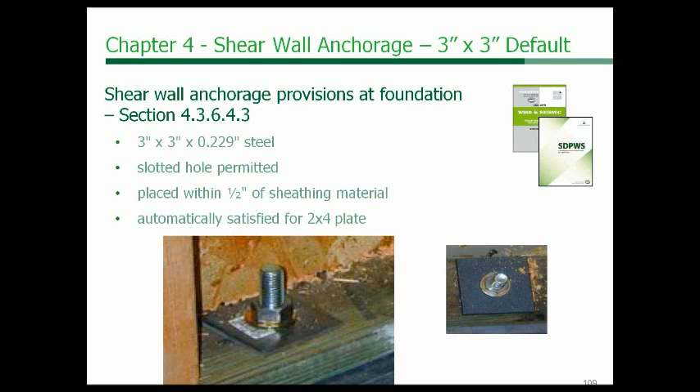There are some exceptions that allow for lower capacity sheathing materials, or if hold downs are in place sized for full overturning loads. But those 3x3 anchorage devices are otherwise required. A slotted hole is permitted, but getting them within a half inch of the sheathed edge is important. For a 2x4 bottom plate, that's automatically satisfied, since with a 3x3 you'd end up with about a half inch on either side. But with a 2x6 bottom plate, you'd have to offset those anchor bolts or use a slotted hole to get those 3x3 plates within a half inch.

Again, there are some exceptions here where standard cut washers are permitted: if the anchor bolts are designed to resist shear only, you've got hold downs designed for overturning neglecting dead load, your aspect ratio is less than 2:1, and you've got nominal shear capacities less than what's shown here for seismic, then you could still use the round washers. So there are exceptions for some of the lower loaded areas, but otherwise the default is going to be those 3x3 plate washers.

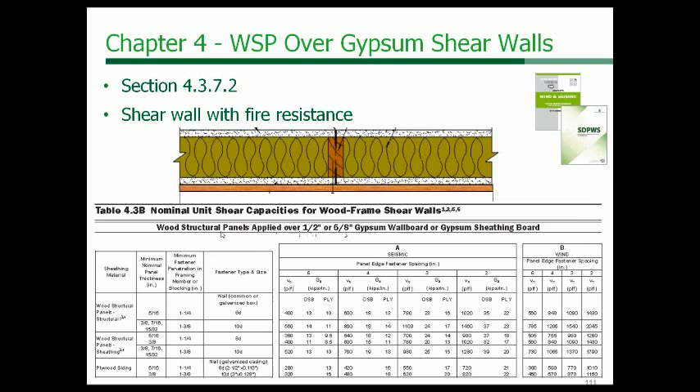You can also install wood structural panels over gypsum. So if you have shear walls that also require fire resistance ratings, there are capacities specifically listed in Table 4.3b for wood structural panels applied over half inch or 5/8 inch gypsum wallboard or sheathing board, and those tables are included as well.

There's also a section that was incorporated in the 2008 Wind and Seismic standard, and we'll give a brief overview of this just to make sure you know your options. You can use wood structural panels now to resist combined wind uplift and shear, or to resist tension only from wind uplift, as an alternate to metal straps. This new section 4.4 was incorporated in the 2008 and has been carried over in the 2015.

Basically what it allows you to do is, once you know your shear wall design capacity of your sheathing—so you design your shear walls first, and you need a minimum of 7/16 wood structural panels to do this—once you have your shear walls designed, let's say your shear wall required 6-inch panel edge spacing and 12-inch field spacing. This simplified approach allows you to determine how much additional uplift capacity you can get from your wood structural panels if you change your nail spacing at the top and bottom edges of the plate to 4 inches or 3 inches on center, as shown in these columns.

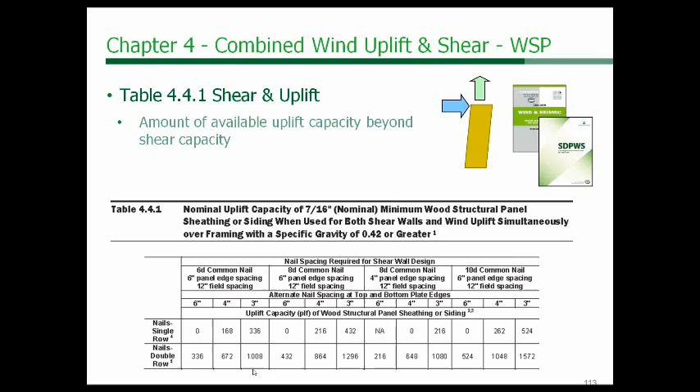And this is all based on testing that was done at APA, our sister association out in Tacoma, Washington.

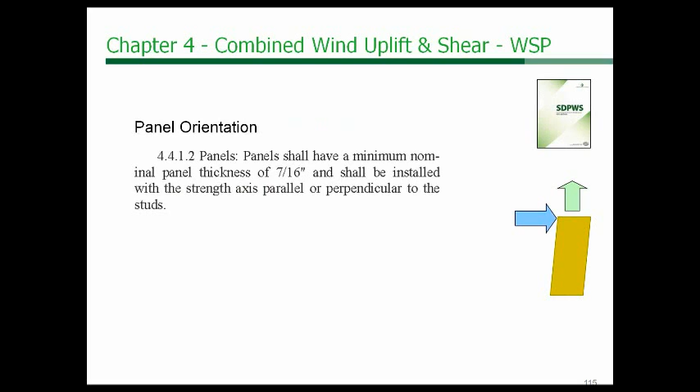Vertical sheathing minimum spacing of fasteners in a row is 3 inches. There's got to be horizontal blocking installed if the panels break intermediate to the stud height, but it does apply to all shear wall types, including individual full height segments, perforated, and force transfer method. But the panels again have to be 7/16 and installed, and can be installed with the strength axis either parallel or perpendicular to the studs.

One of the things you need to be aware of if you're using this approach is that there is the potential to create tension perpendicular to grain stresses in your blocking. So let's say you lay up your panels and they break across a stud at the mid-height or at some intermediate point, then you have to make sure you account for any cross grain or tension perpendicular to grain that could occur in the blocking, because now you're resisting those uplift loads, tension, across this blocking.

And so the details there that come into play include using some wood structural panel sheathing that is the same thickness and makeup as what's used for the wood structural panels here on the exterior of the stud wall. And so that wood structural panel sheathing that's added to the blocking then takes care of that cross-grain tension that can occur here in the blocking.

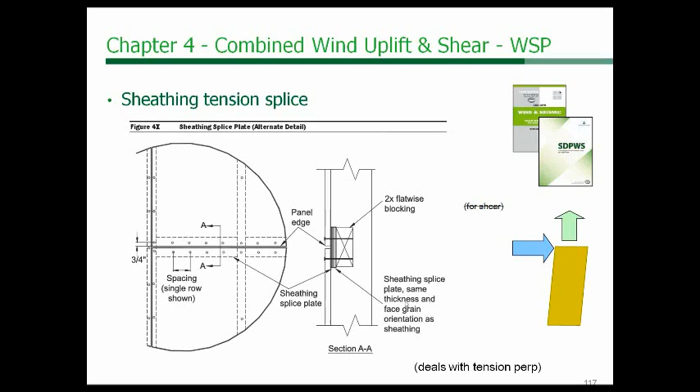So there are trade-offs to this approach. Obviously, with this approach, you don't have all the metal straps that you had on each stud before, but you do have some additional blocking detailing if you end up with sheathing splices that occur at mid-height of the stud. So you have to talk that over with your contractors and builders to make sure that they're on board if you were to take on this approach.

And then we go through an actual example here of a multi-story example. I mentioned earlier that you got to make sure you avoid tension perpendicular in any blocking if your splice joint occurs across the studs, but you also have that same issue with the band joist where you're now transferring tension and it's perpendicular to grain across the band joist. So there are nail spacing limits here to make sure that you don't exceed tension perpendicular to grain allowances in your band joist.

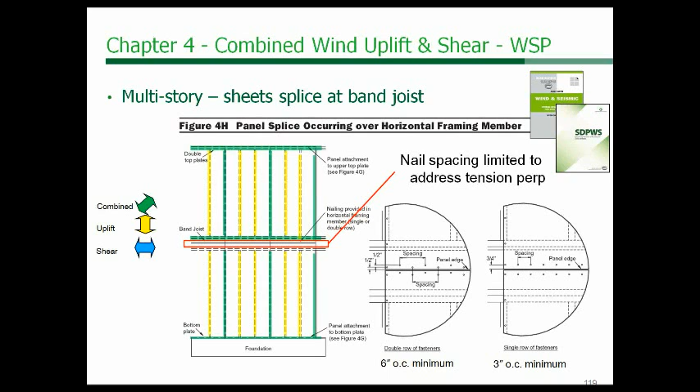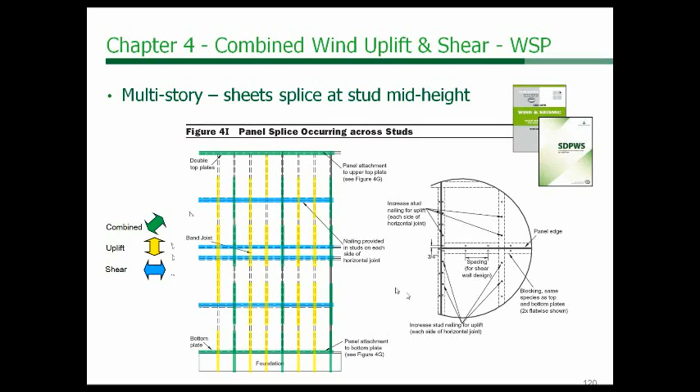So there's some prescriptive limits that come into play there for single and double rows of fasteners. And so what you see here are where you could potentially have splices at mid-stud height. Again, special detailing provisions for the blocking there. And then this color, this key here shows where you're resisting uplift versus shear versus a combination of the two with your nails. So I won't go into any detail here with the example problem. It's something you can take a look at on your own. We want to leave a few minutes for Q&A here at the end, but this is a pretty good example that you can work through.

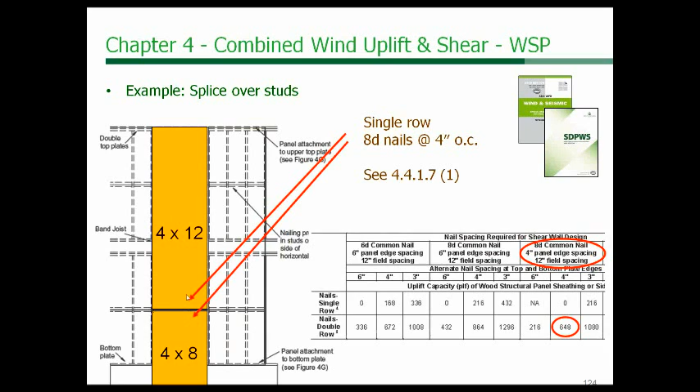We've covered this in other seminars as well, but I'll point out that once you've got your rows of nails at the top and bottom plates, you also need to go back and make sure you've got enough nails in the interior of the panel to carry those uplift loads through the structure. So there's some additional calculation beyond what you see in the table, which covers the top and bottom of the panels. You have to make sure you've got enough capacity in the interior as well to carry those uplift loads. This example problem walks you through that.

The other thing this provision allows for is handling uplift only versus combined uplift and lateral loads. So let's say, for example, that you do your shear wall design and you only need a couple of full height panels at the corners of your structure. You could use the panels in the interior of the structure to carry your wind uplift loads because those interior panels may not be needed for shear. This table allows you to size those panels to carry uplift through the structure.

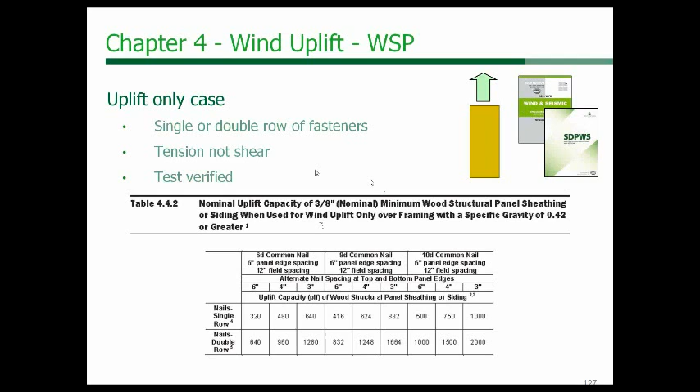What is new to the 2015 Wind and Seismic standard is the spacing of the anchor bolts for this approach. As you can imagine, since we're carrying a lot more tension through the structure, there's a lot more potential for additional uplift and cross-grain bending on this bottom plate. So in the 2008 Wind and Seismic standard, we prescriptively set the spacing for these anchor bolts to 16 inches on center. If you're going to use this approach, you spaced your anchor bolts at 16 inches on center regardless. It was just a prescriptive approach.

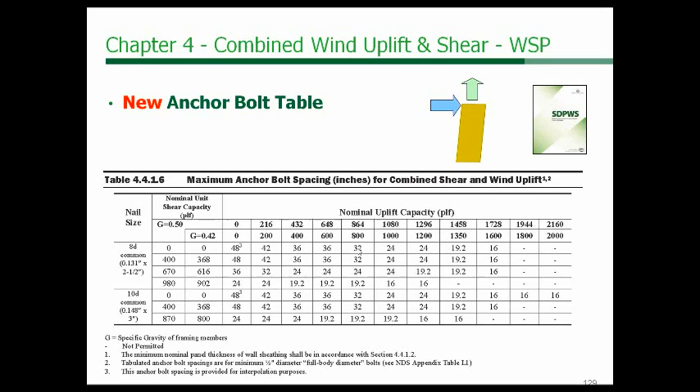Well, we did some additional testing and analysis, and now there's a new table in the 2015 version that will get your spacing up from 16 inches on center all the way up to 48 inches on center, depending on your configuration. Take a look at that new table, 4.4.1.6, and that'll give you some relief for the anchor bolt spacing in this combined approach for combined shear and wind uplift.

The other clarification is that if you've got sheathing extending to the bottom plate or sill plate, we now have minimum end distances for those bottom plates. In 4.4.1.6 paragraph 3 we've outlined those new end distances, and the provisions give you a sense of what those end distances are: 7D or less than half the tabulated value, or less than 12 inches on center, whichever controls.

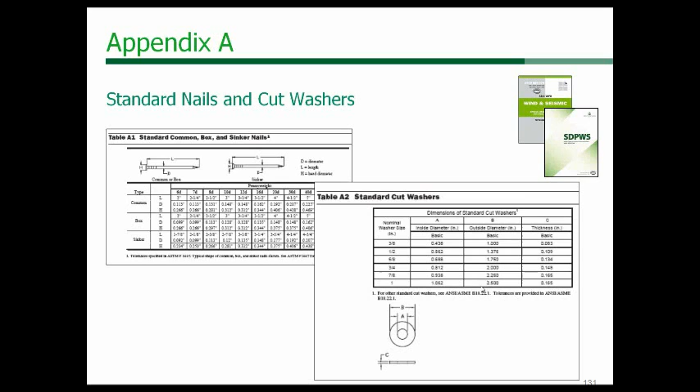There are a couple of appendix chapters. These remain unchanged, but just so you know, we often get questions about what are these nail dimensions if I'm using pneumatic nails versus what you call out for common and box nails. What are the dimensions? Appendix A gives you the common, box, and sinker nail dimensions. You can use these to match up with your pneumatic nails. There are also some standard cut washer dimensions shown here that didn't show up anywhere else in the standards before.

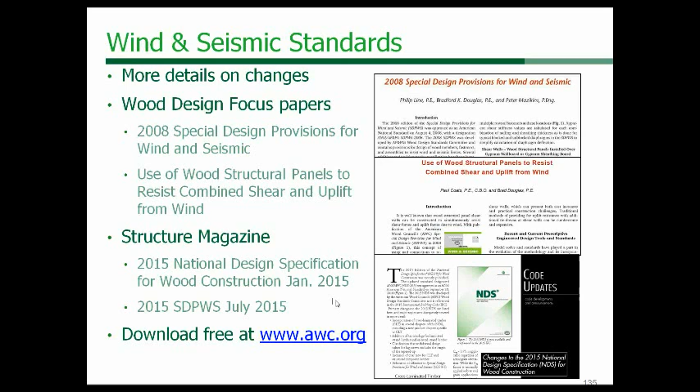Also want to point out that just prior to today's webinar, we were able to post a paper that outlines the changes to the 2015 Wind and Seismic standard. We'll go open up the web browser here in a second and show you how to navigate to that. We also authored an article for the July issue of Structure Magazine, so it'll be showing up there as well. But if you want to go to the website, navigate to the 2015 Wind and Seismic page, you'll see an icon there that says what's changed, and you can download that paper as well.

So, Michelle, I'm going to stop there. I think we've had some questions come in, and I see Brian has already posted the link to that paper there in your chat box. So if you want to get that paper downloaded, you can click on that link right in the chat box and navigate there.

So what kind of questions came in while we were talking here, Michelle? Okay, just wanted to point out one thing you touched on is the icon of what's changed throughout our website. We have those icons on, and if you click on that, you'll get information on past changes also for the NDS and other publications. Now, for the questions, we had one regarding the blocking: what's the minimum depth requirement for blocking for diaphragms or shear walls, and can you use flatwise blocking?

Yeah, and you may have to help me out on this because this was over in the diaphragms section. I believe the minimum is 3x for the high-load diaphragms. And then for the shear walls, if you're using horizontal panels, as I mentioned previously, the blocking for that depends on the nail penetration requirements in the table, which lists the minimum penetration requirements. Yep, that's a good point.